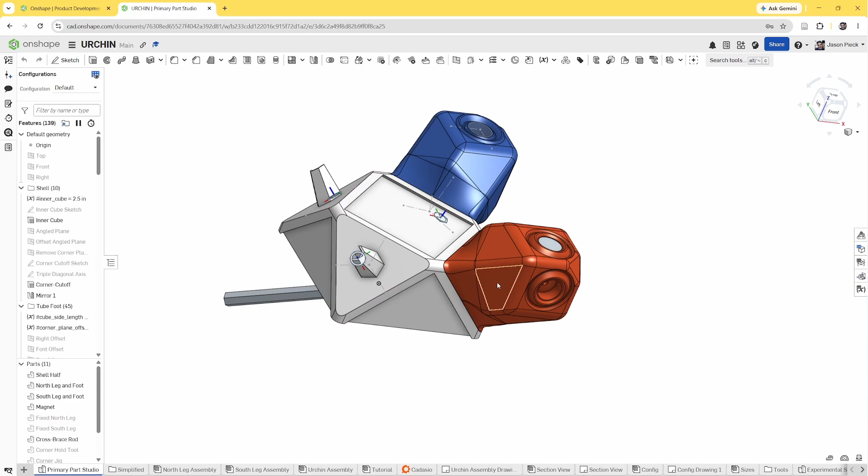So what we're going to start with is a model on Onshape that I've been working on. The first thing we need to do is export the geometry into a file format that the 3D printing slicing software can actually process. We do that by either selecting a part from the parts list on the left side, or selecting the face of the part that we want to export.

Here we can see export as an option. When you click that, we're going to get a bunch of options. We're going to select the STL file format, keep y-axis up, binary is fine, and we're going to keep the units in millimeters.

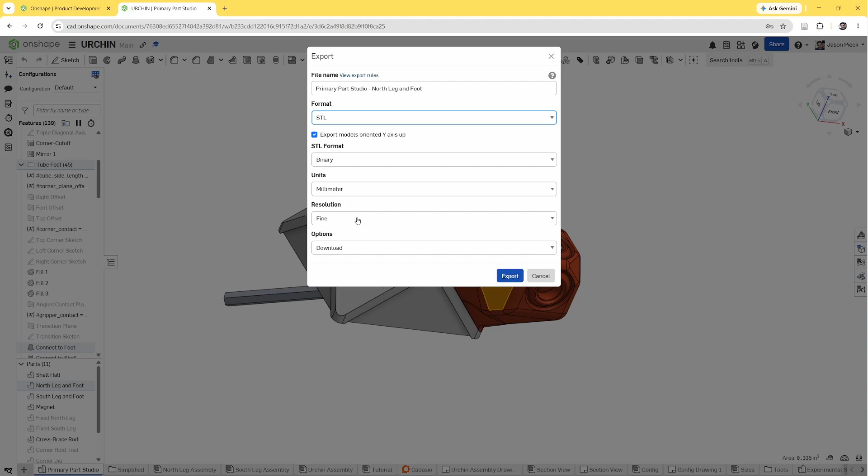For resolution, if you have the space, I would recommend fine, but if you're doing a part that you don't care about how it looks, you can reduce the resolution to something lower. We're going to just download it, save this part to the downloads folder as an STL, and we're done over here.

Next we're going to head to PrusaSlicer. I've already loaded in, and the main thing to make sure of is that you have your correct printer selected. You can select the printers from over here, and if you need to add printers, you can do so from these subtext menus. Today I'm using the Prusa XL with 5 inputs so I can do multi-material printing, but for whatever you have, settings may differ. The main thing that's going to change is the build plate size—you just want to make sure that whatever you're printing is actually going to fit on the printer itself.

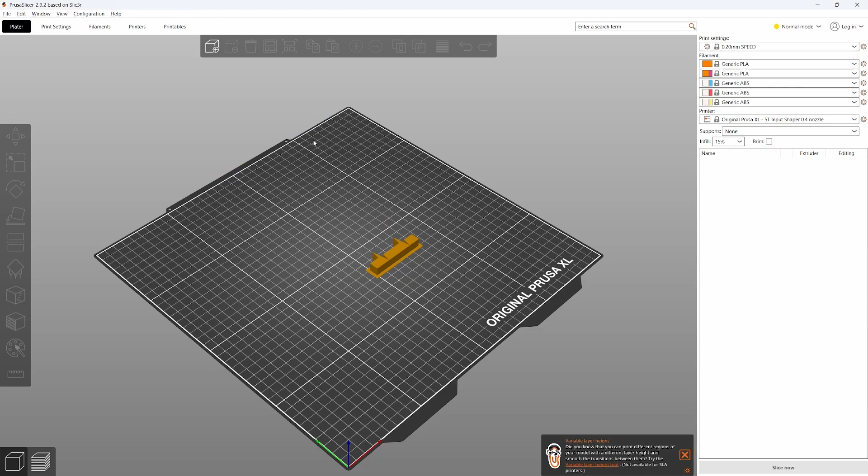From here, all we need to do is add the part. We can just load it from the downloads, and we can see that we've actually imported the part here into our slicer. We can see that currently its orientation is not ideal for 3D printing, so what we can do is go over to the place-on-face tool and place it on this face. And there we go.

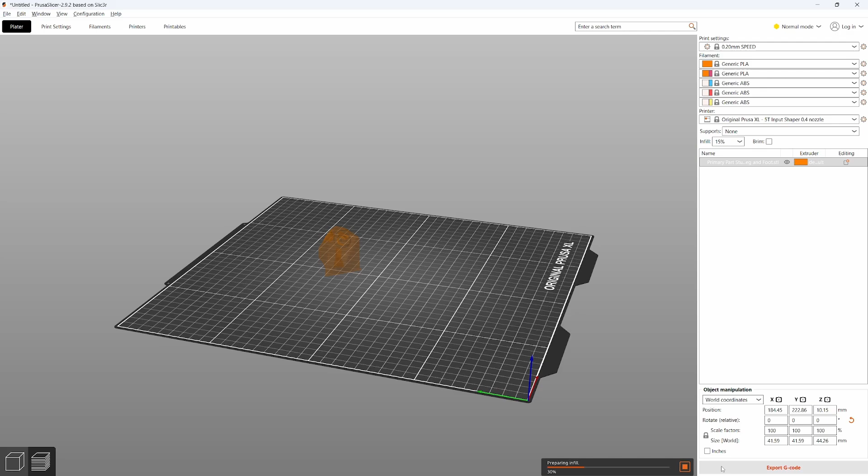Once I'm happy with how it looks, I'm just going to go ahead and head to the Slice Now button. It's going to go ahead and do some calculations, and we can see here that it has broken down the part into a series of layers that the 3D printer can print. If you wanted to adjust some of the settings, you can do that under the Print Settings tab.

I want to adjust the infill, so I'm going to do that under the infill option. I'm going to change the pattern to something else like gyroid—gyroid's my personal favorite. Now if we head back to the plater, we can reslice it and check. We can see that the interior pattern is different now.

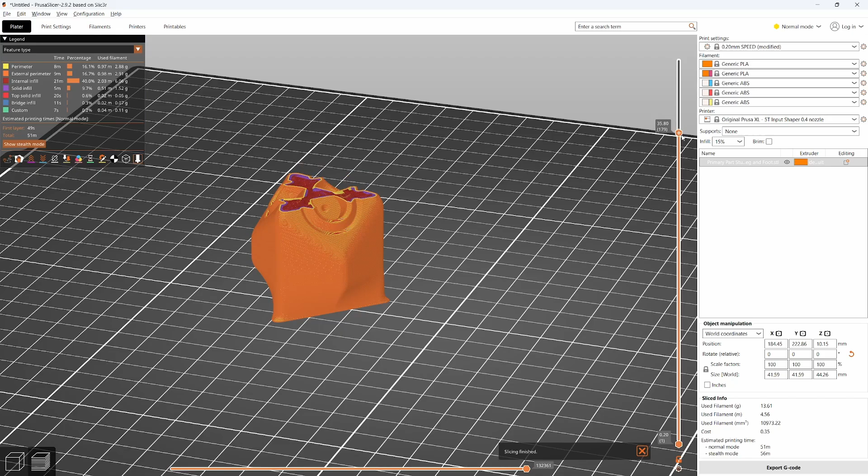Once I'm happy with all the settings, I can just head to export G-code and save it to my removable media. And now you're ready to load this into the printer.